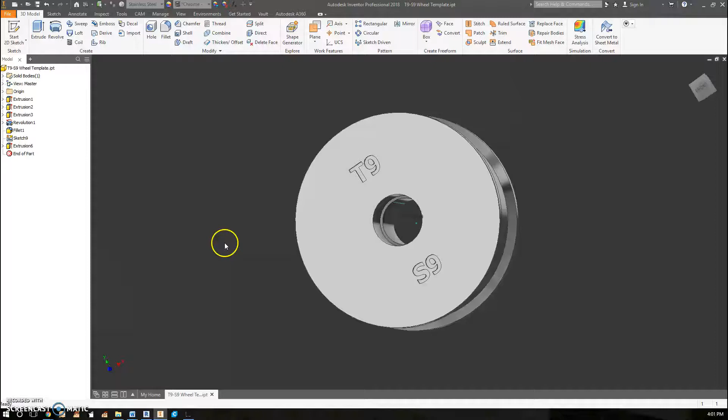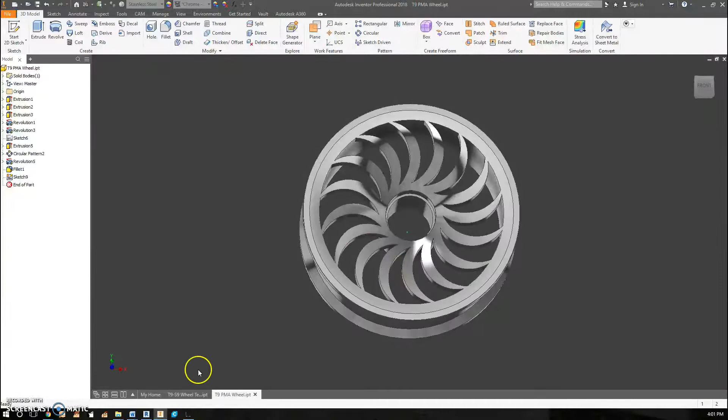Okay, so let's show you how to do this revolve cut that I've been saying to try to give your rim some kind of three-dimensional feature, like going into the surface like this one, cutting out the back like this, or even coming out a little bit like, say, this one.

Comes out the front a little bit. I'm just going to do the simpler one now. So here's the blank, one of the blanks I sent you. First I'm going to get rid of this label.

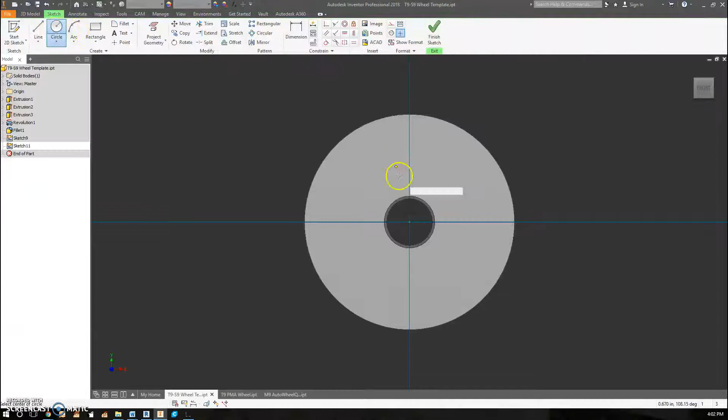Okie dokie. Now I'm going to cut out some material here. I don't know where that...

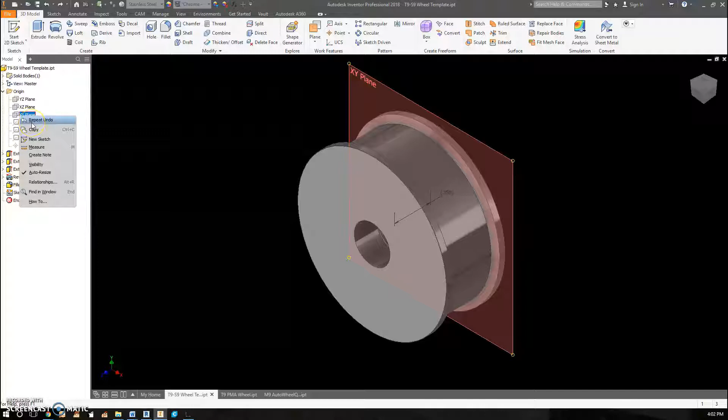You know what I should do? Show you something else here real quick. Where is my axis at? Let's do a new sketch through here. Appears that no, it's on the back. Never mind.

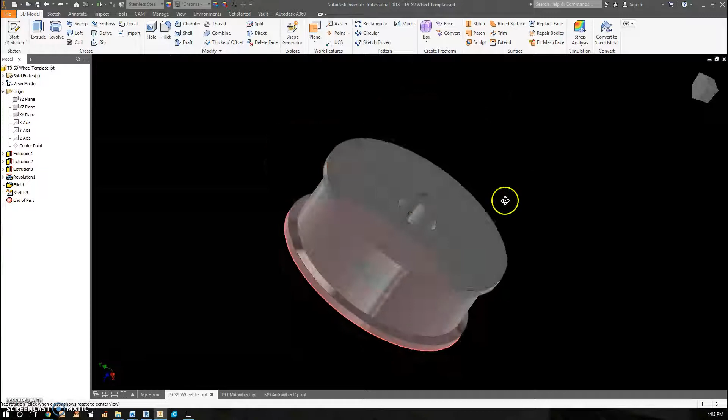So let's just, I'm going to create a new work plane here. I'm going to go plane between two planes. This isn't really the point of the video, but do a new sketch so I can see how far out I can go when I remove some material here.

New sketch, F7, slice graphics. So I'm going to draw a circle, say to about there. Let's not cut into our wheel.

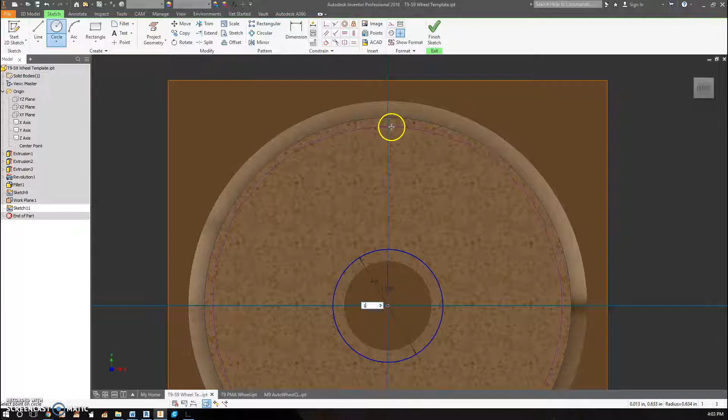Yeah, it's not good enough. 1.3. Whoa. Something like that, so I don't remove too much material. Finish sketch.

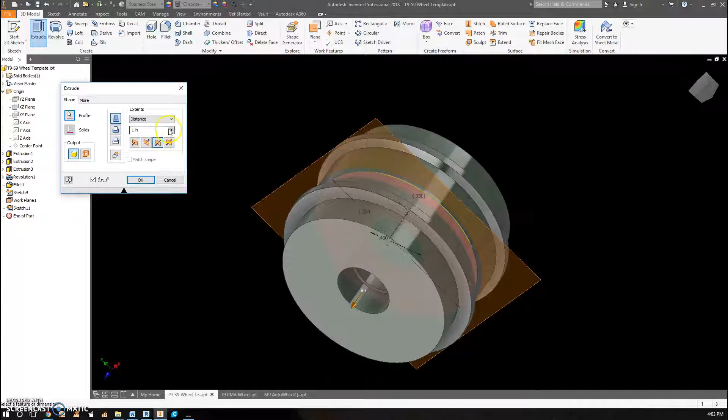Extrude. Symmetrical. All cut. Okay, so now I've got this kind of blank where I can draw my spokes, or whatever you want to call it.

So I'm going to draw that on this surface. See if I can make something up here quick. First I'm going to project geometry of this and this. Then I would like to draw an arc. I'm just going to make this up off the top of my head. No, I didn't want it there.

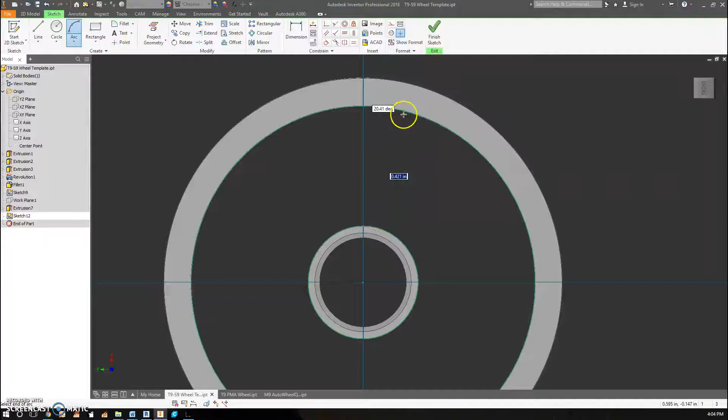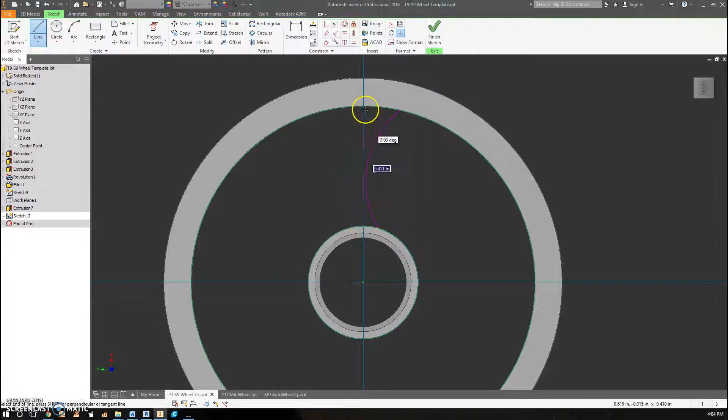Let's try that. And then what I might try, let's just mix it up a little bit. Let's put a line from there to there. There's a good chance this won't work, but I'm going to try it.

Extrude. Oh, it is going to work. I want to go that way. I'm just going to go 0.1 or something.

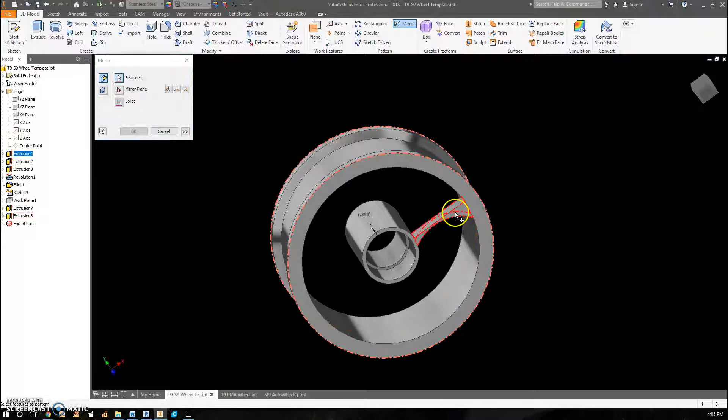Then what I'm going to do is I'm going to mirror the 3D feature, because that always works way better than trying to mirror within the sketch.

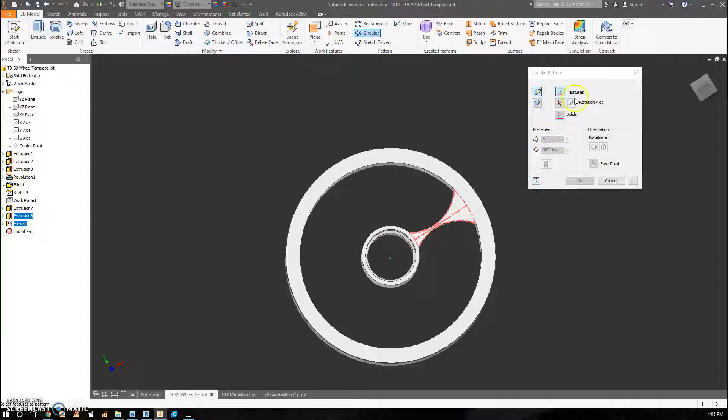Okay, so that's what I'm going to try to, then circular pattern. Come on now. Just come over here and click on the stupid things. And then my axis is the Z-axis, the way I've drawn it.

Let's try 6. That's pretty ugly. What's 10 look like? I don't even know what I'm looking at.

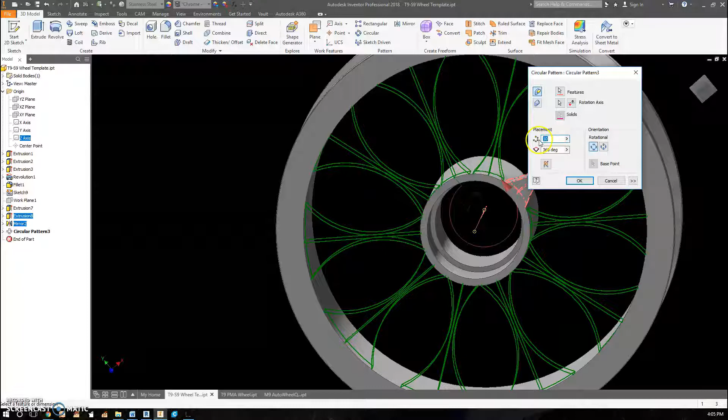Okay, whatever, that's ugly. Okay, now let's get to what I actually wanted to show you. Both these planes cut right through it, so this is what I'm going to draw a new sketch on.

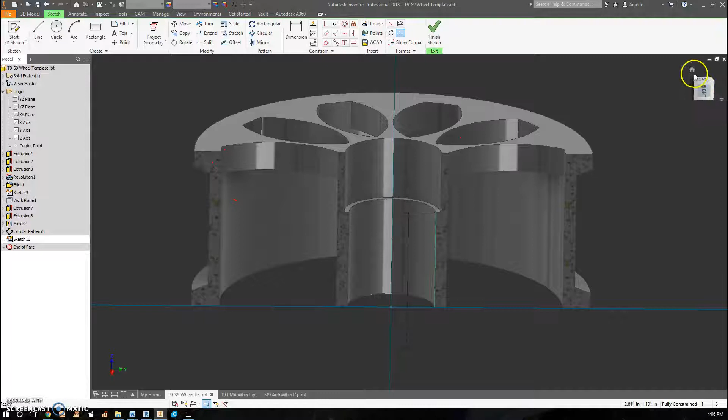Slice graphics. What I want to do is take some material out of here. So the way I'm going to do that, first of all, let's see.

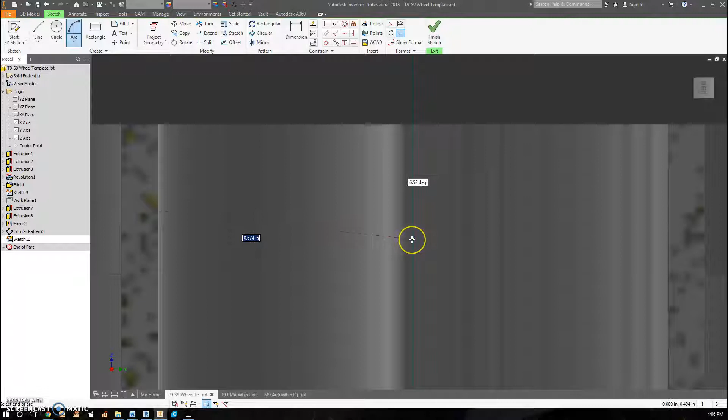I'm going to draw an arc going to start it. Let's just pick the point here and come down to the middle. I don't know what I'm looking at here.

And then I want to draw some kind of cross-sectional area that I would like to remove. And I'm going to draw just kind of out here, doesn't really matter. And back down here.

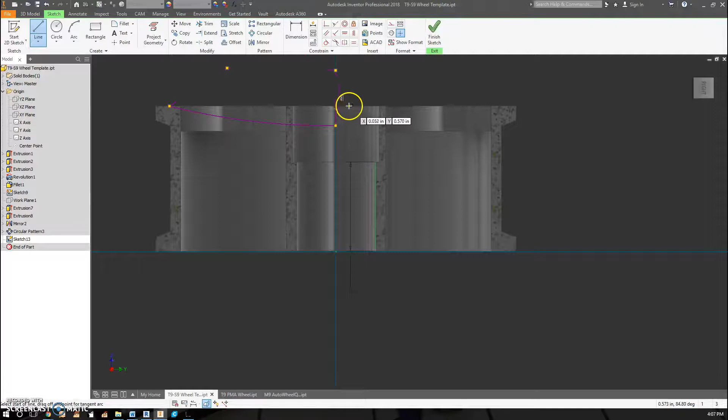See, I'm not to the origin, so that could be a problem. That's my axis there.

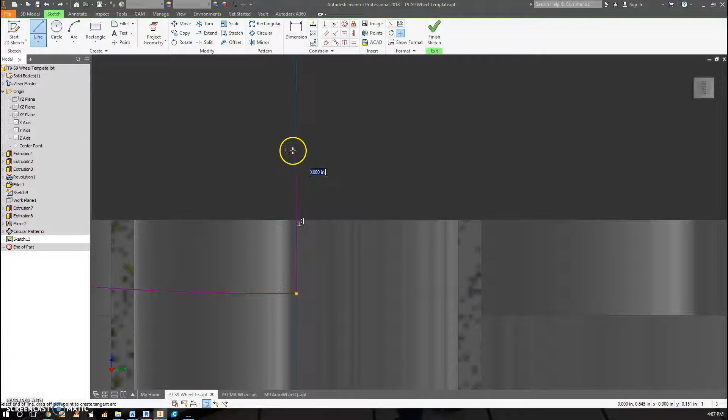It will not let me do that. That looks good. What the heck? Okay, so let's make sure it's in the middle. Now I can finish sketch, and that's my cutting.

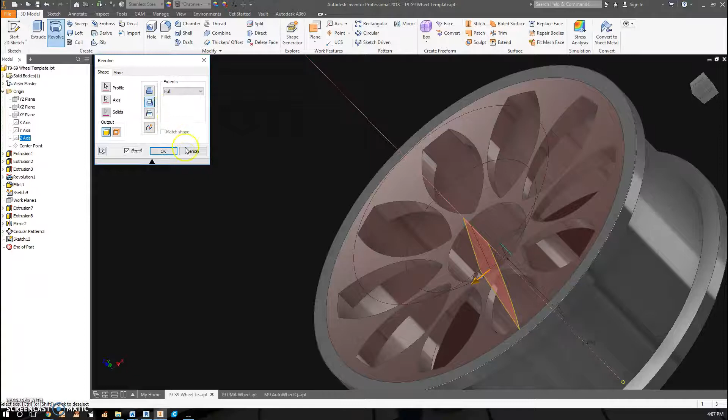I'm going to revolve this around my z-axis, and I want to cut in this case. Maybe you'd like to look at that. And what it has done is then created a kind of an indentation there.

And if you had still a solid blank, you could do the same thing to remove this bottom material out of here if you want.

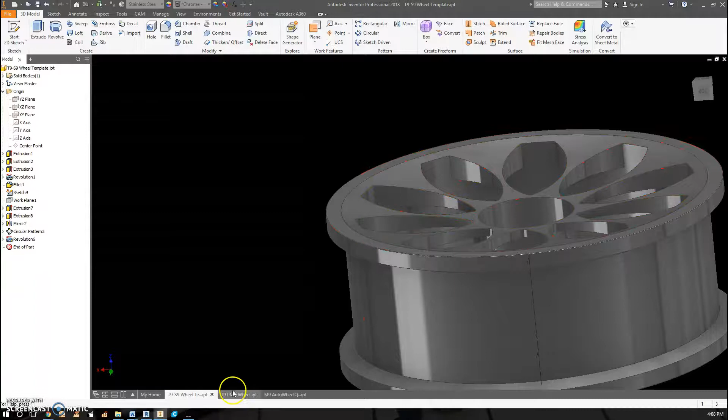If you wanted it to stick out, what I did, I believe, on this one was extrude these spokes out farther and then drew a nice cross-section, some different revolutions with these different cross-sections.

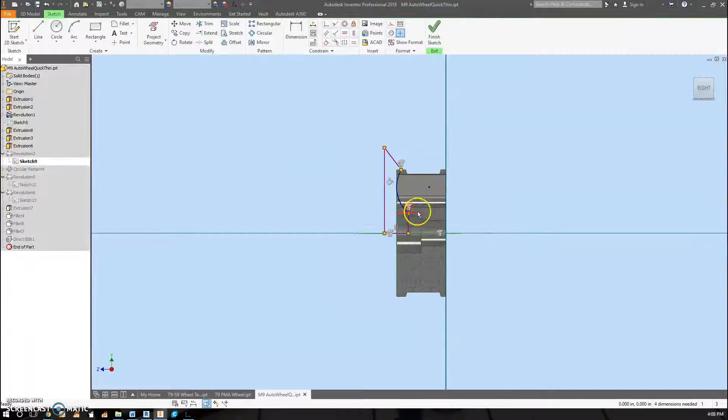This one, so that's kind of how I did this one. So I had this come out farther, and then removed a lot more material.